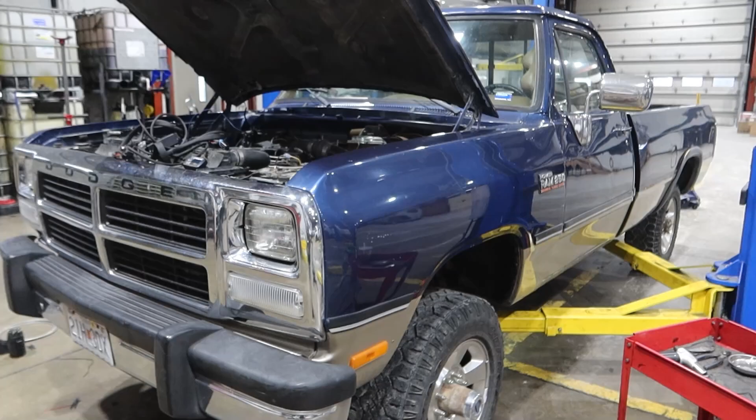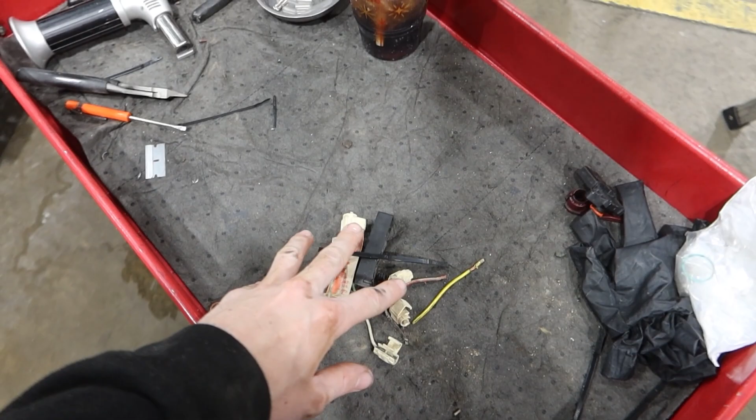Alright guys, we are back with the blue truck here on another portion of the 47RE swap. Today we're going to be doing some of what people question about how to control the 47 and make it shift. I've already cleaned up some wiring down there, got rid of a bunch of the Jesus clips that were in for a trailer brake, and just cleaned up the wiring on the side of the frame.

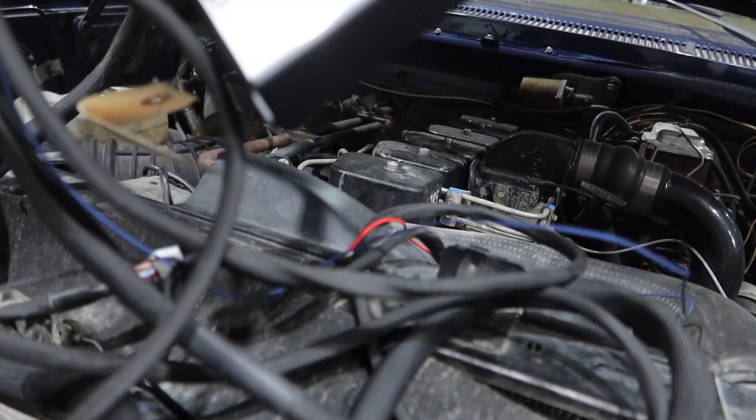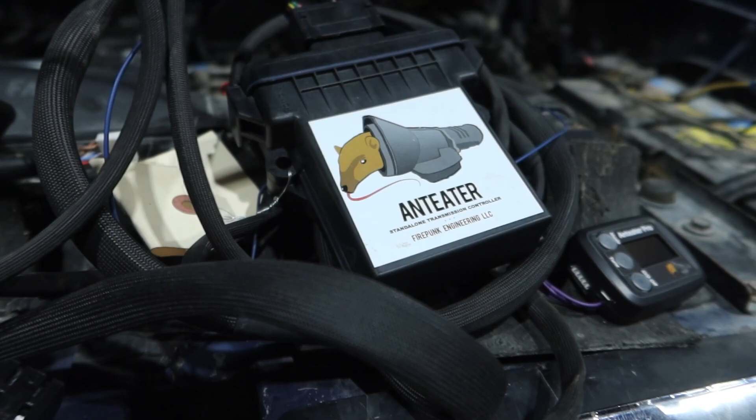So now we're going to roll into the transmission harness and putting in our Firepunk Anteater. This is kind of what makes the world go around with this swap, because you have to have this in order to run a 47RE in a first gen, because a first gen cannot control a 47RE on its own. It's electrically controlled, so most are worried about adding more electronics to a first gen, which I'm going to be doing a fusible link delete.

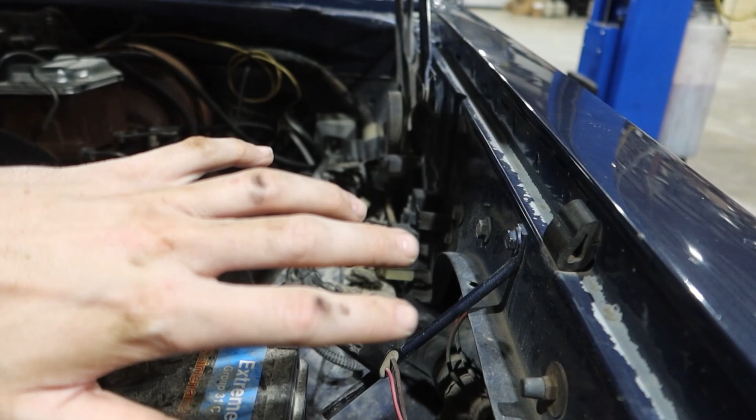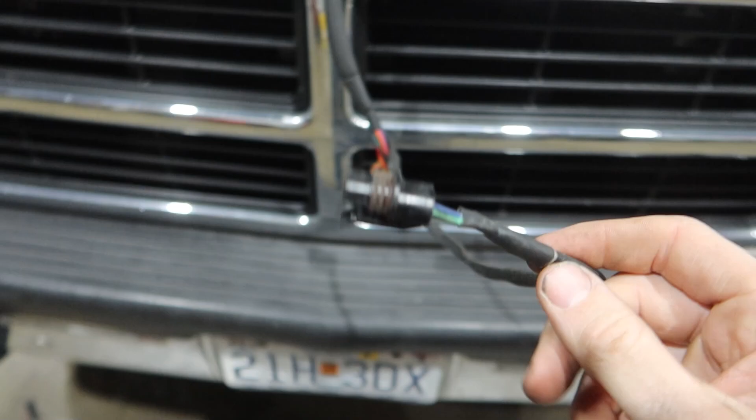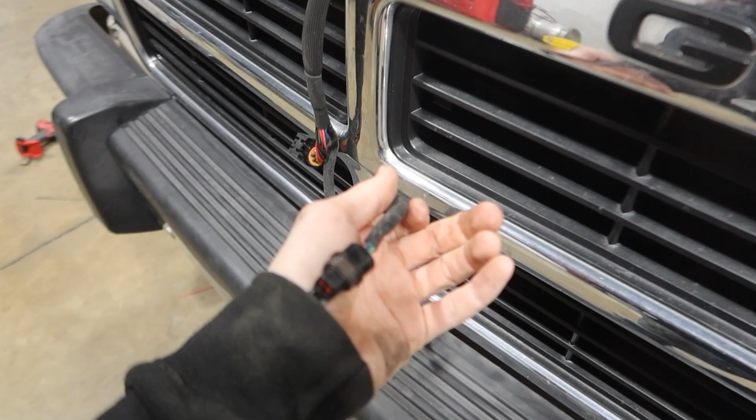So all this will be cleaned up, and you just have to have good sources of power, and there's really not much to this. So here's your control box, and then here is what goes down to the transmission. You literally just have your 8-pin that plugs into the top of the transmission at the valve body, and then you have your speed sensor that plugs into the transmission itself. So you are not sacrificing anything with the factory speedometer by unplugging it, because the factory speedometer is in the transfer case. So you'll be able to maintain your speedometer on your dash, and then the anteater will be able to read the speedometer it needs to see for shifting and whatnot.

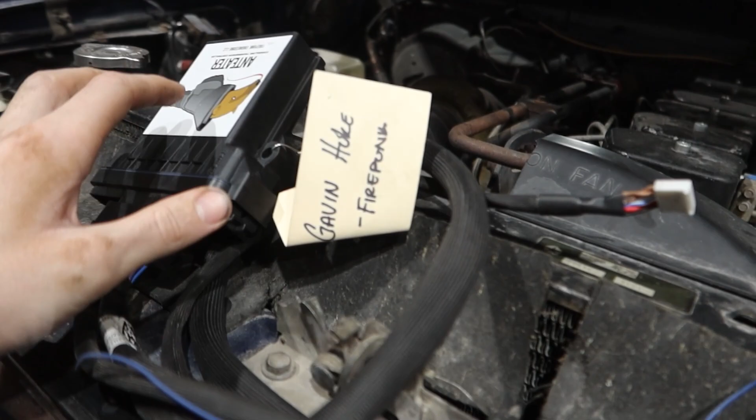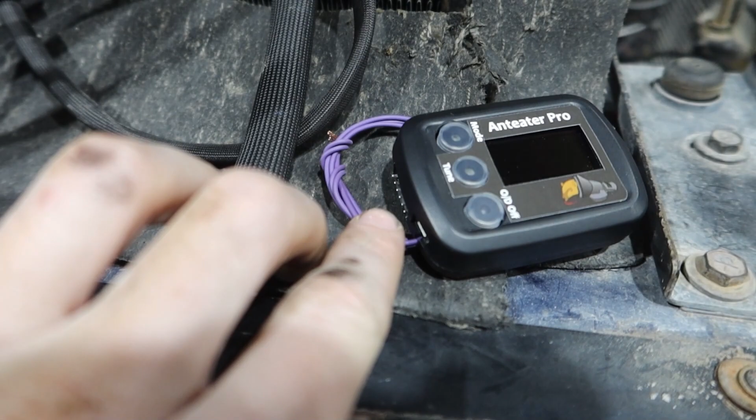This connection right here plugs into your anteater. The purple wires coming out the side are for the tap shift. I will show you guys how I'm going to do the tap shift whenever we get around to that. That'll probably be a separate video.

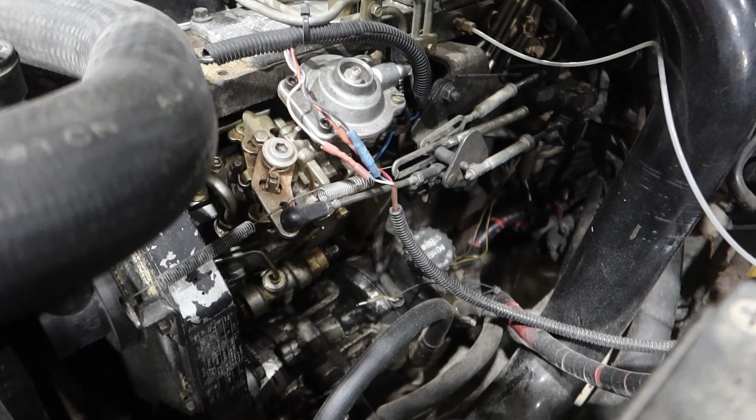And then you've also obviously got your wires. There's going to be a power and a ground, and then you're going to have a TPS wire. So that's another big question: first gen TPS sucks. So what are you going to do around to make that function as it should? Essentially, all I'm going to do is get a first gen TPS and just try and make it work. If it doesn't, I'm going to try a 98.5 to 04 TPS and see if that will work. I'm just going to see what works best, really. So you guys will have to stick along to see that part of the progress, but we're going to go ahead and wire this bad boy up, really just try and make our whole trans harness look clean.

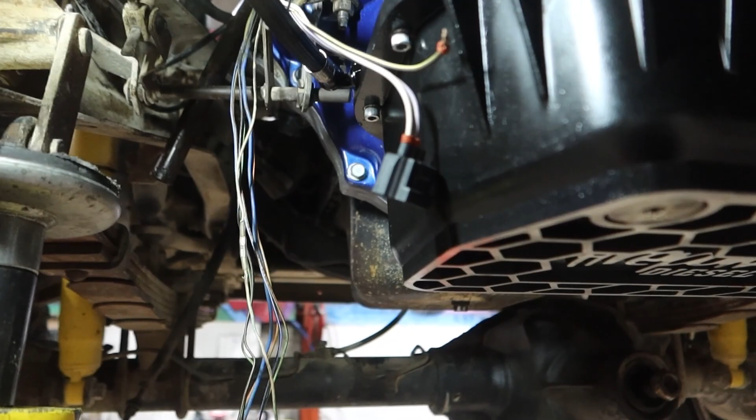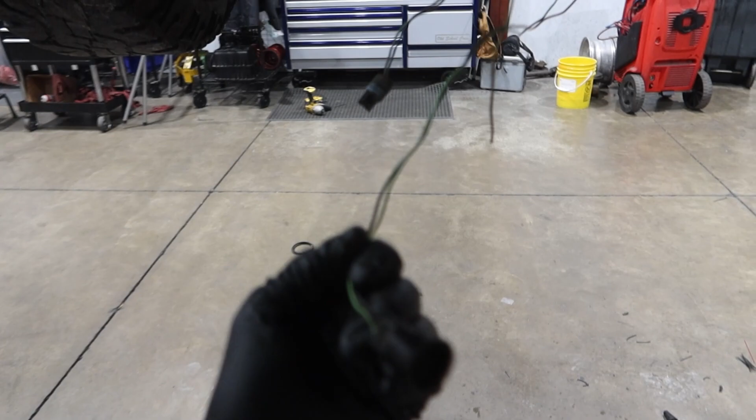Alright, I want to show you guys what I'm doing. So we've got our whole harness here for what the original transmission was. All of what I have in my hands right here, we don't need anymore. It was some old, like a transmission line temperature sensor, and then maybe something else, I'm not sure what it was, and then the T-case sensor, the four-wheel drive sensor. Don't need any of that. I pulled my neutral safety wires, if it'll focus, pulled those out of it.

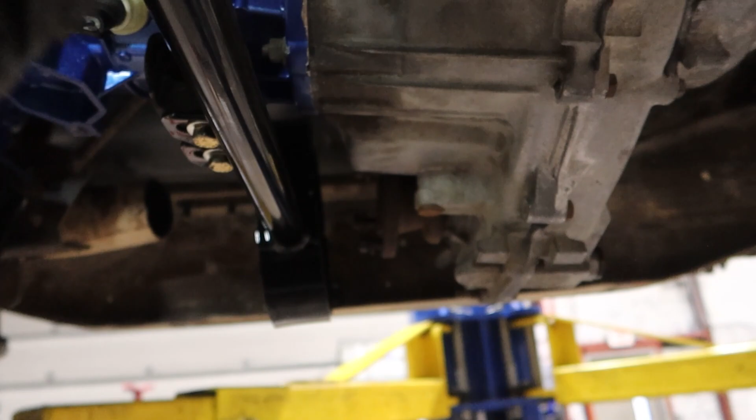And I pulled my factory speed sensor wires out of it, so got those both strung right here. I'll loom them up, and I had to repin this connector because my old connector had seen much better days. This thing isn't focusing very good today, but you get the idea. The connector was pretty well toast, as far as the clip on it, it was no good. So I went and got a connector.

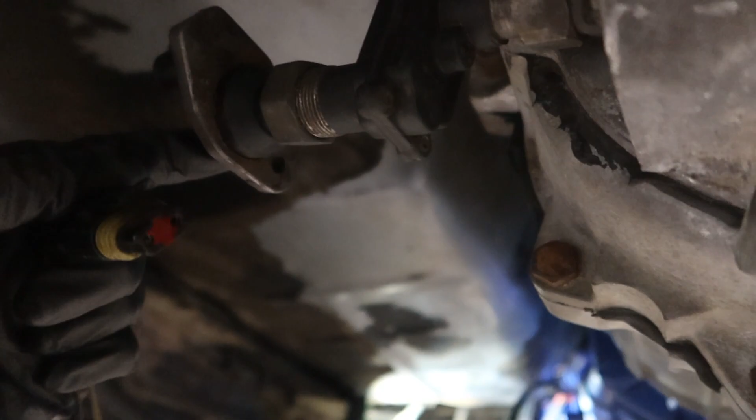The oil pressure sensor is the same connector. Okay, oil pressure sensor is the same connector. So all I did was go to the harness on the shorty, because none of that's being used, and I just cut the pigtail out of there, and it plugs right in. Works great, and the clip's good. So I want a good connection here on the speed sensor, because nothing drives me more crazy than a non-working speedometer. So we've got that.

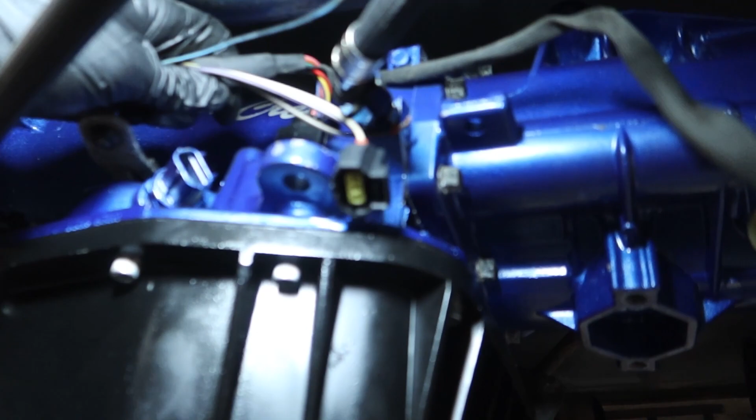We're going to splice that in, but before we do that, we got to put loom on everything. So a little bit here, which I don't think I'll use that, I'll use the actual loom that's not split loom. We're going to put the anteater stuff and everything in one harness, so you won't see the split up wires.

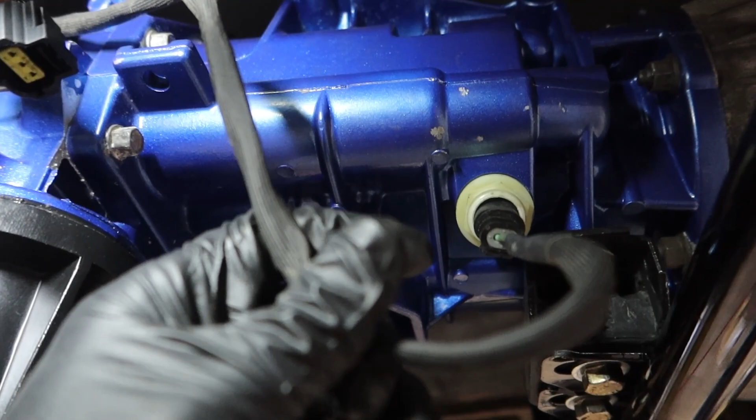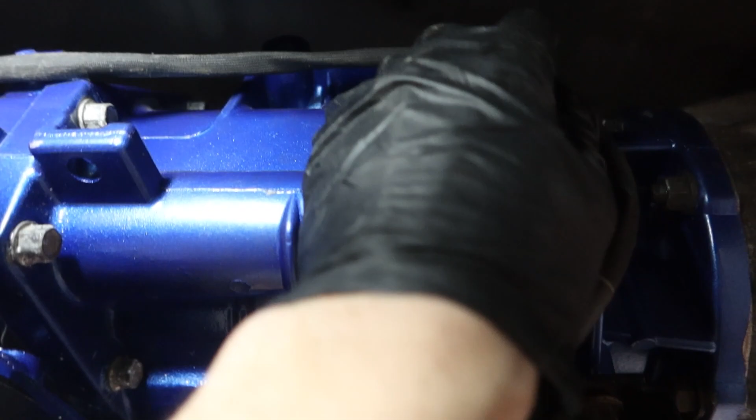It won't be two separate harnesses, it'll be one big one. I might shorten the speed sensor harness on the Anteater because it's way too long, and I want everything to be very clean and tidy. Or I might leave it alone and run the harness up around there with a zip tie, Christmas-tree style, around them into the mounts up here so that'll tuck it up. We'll see, but basically just tidying up wiring and making things look nice.

You guys can see from earlier that this already looks way better. There's not just clusters of stuff, it's pinned up to the frame. We got everything in the loom and all the Jesus clips out. We call them Jesus clips here at the shop because when you use them you're just saying, God, I hope this works, because they are worthless.

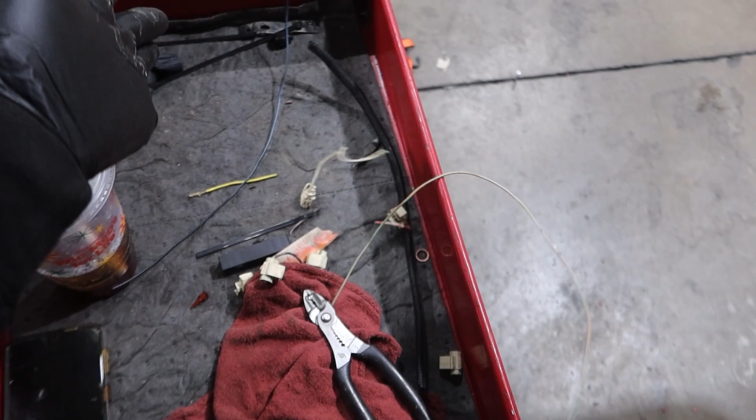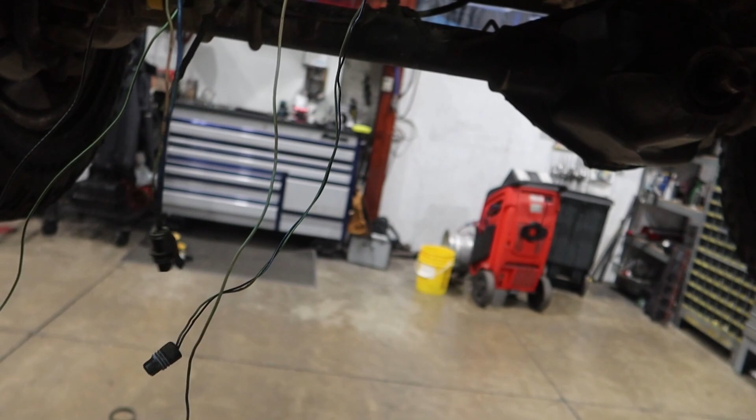I'm going to continue with the wiring portion. The wires we're not using, I'm going to cut down here, but when I get back on the top side of the truck I'll pull them out so they're not just a bunch of cut ends still receiving 5-volt or 12-volt power — just so nothing happens. I'm going to try to do it the proper way. But I'll keep some of these pigtails because they're very common on these trucks, I might need them on another broken clip or something. So that's what we're gonna move on to.

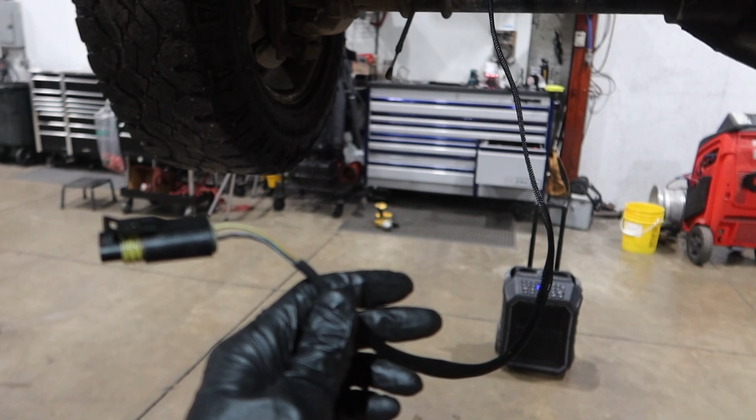A little bit later I want to show you guys my finished product for the most part, besides hooking up my neutral safety switch after I remember which pins go where. It's loomed all the way to the top, heat shrink everywhere down to the split, then there's the neutral safety, and here's my speed sensor wire that goes on the T-case right here. That's literally it — I wasn't able to consolidate them into one loom because I didn't want to de-pin the 8-pin connector, it's more time than I want to spend. But they'll run up next to each other, and I'll zip tie them together to make them look like one harness, then pin them right here.

It should look good. So in a couple minutes, after I get the neutral safety taken care of — I'm hoping I get it right on the first go, because I had it right before and messed it up — I'm gonna try that, then loom it all up nice and move up top to continue that part.

This really isn't that lengthy of an install by any means. I'm just trying to clean up Chrysler's terrible wiring — it's messy and crusty, so I had to repair some wires while I was at it. But it's turning out a lot better. Once I get these lines pinned up it'll look even better, and once we get rid of our factory fuel stuff and put an AirDog on it, our fuel lines will be gone, so I'm pretty excited for that.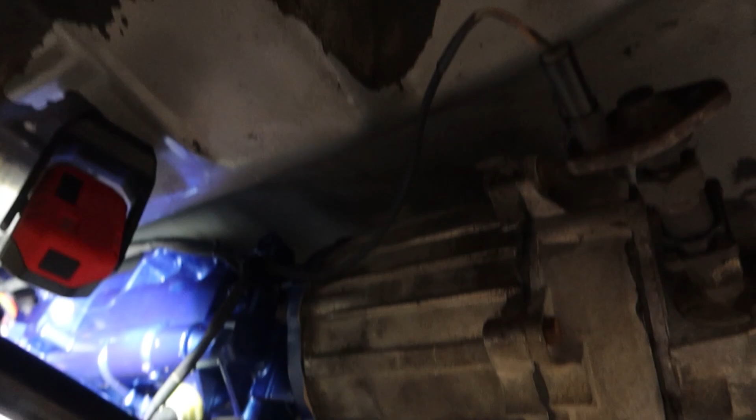Alright guys, so I'm finally all tidied up down here. I got everything pretty loomed up. This is where the split is for the neutral safety and whatnot, and the Anteater harness is up there. Looks pretty clean. Here is the neutral safety pins.

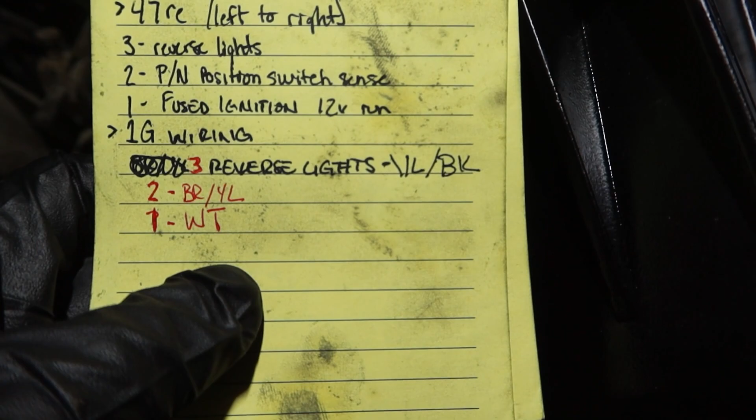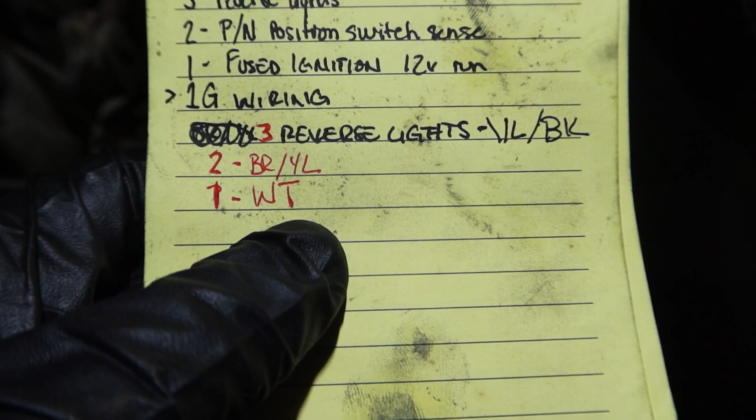Here's the after of the video I took earlier where it was very messy with all the different wires down here, but we're going to lower the truck and go up top and start working up there. Here's the finished product for that.

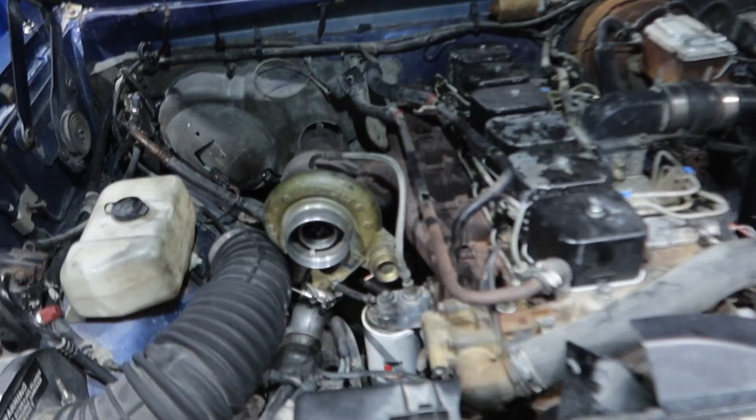Okay guys, I want to show you some notable things to keep an eye on if you are getting rid of your heat exchanger. As you know, I did delete my heat exchanger when I put the new trans in, because I got rid of the factory lines and all that stuff. The factory trans cooler was literally about the size of this, a little bit taller, that's it. But my new CNR cooler will do everything that stuff did and more.

But the top heat exchanger piece - let me get the light in here. You can see where that was right there, where I've got that fitting in the block. I'm gonna guess that's like 1/2 inch pipe thread, maybe 5/8 pipe thread, not 100% sure. I just had one of the plugs, luckily. And the next one is on the lower water neck down there, because that's where it goes into, and it originally would have had this style fitting.

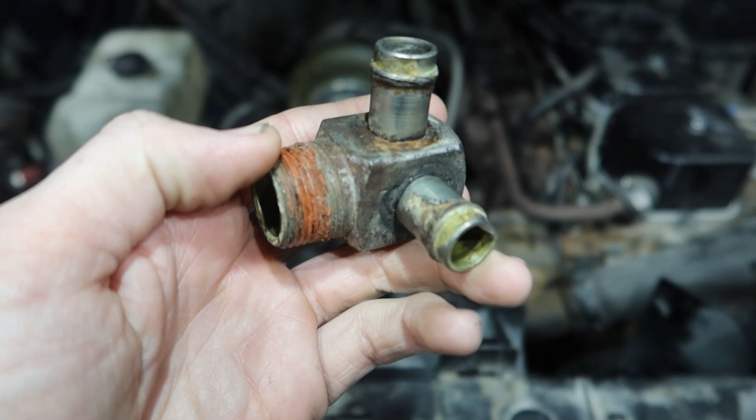So one side goes to the heat exchanger, the other side goes to the heater core line, which is right there. So essentially, if you were to know this ahead of time, all you'd have to do is order one of these for a manual truck, because the manual trucks obviously do not have the heat exchanger.

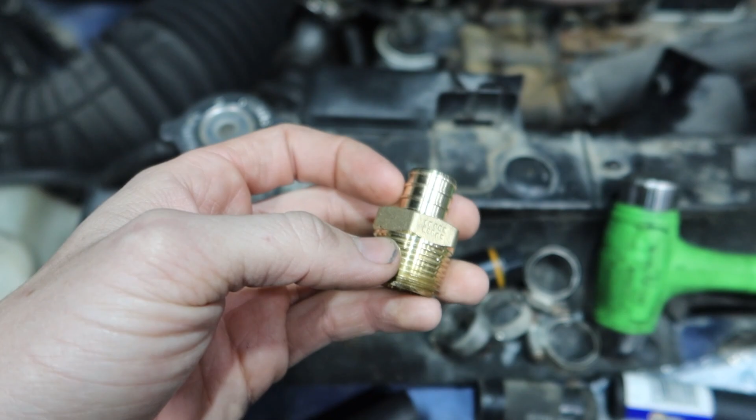Now, with that being said, I didn't want to wait. So if you're caught in the same predicament I am, I went down to my local parts store and found a 3/4 inch MPT barb. And this is, technically it's 5/8 - this paper says it's 3/4, but it fits in the 5/8 side, so I don't know if something was mislabeled. Not really sure on that, but it is 3/4 inch MPT. That you do need to know.

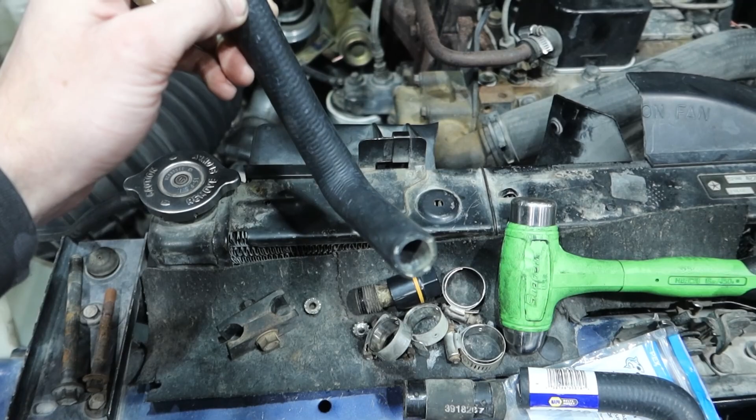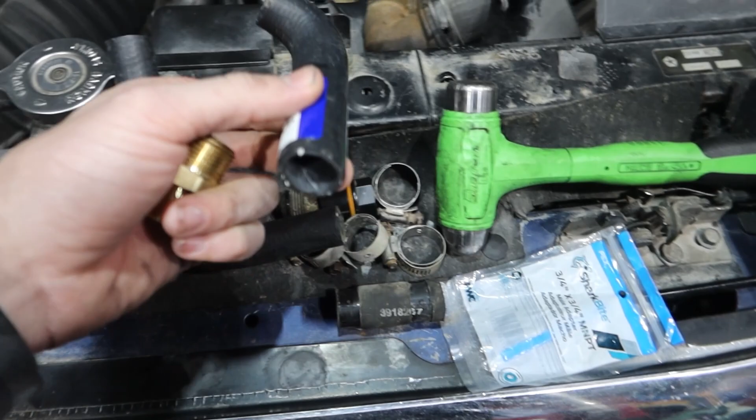But you just need a 5/8 barb, really, and I got a 90-degree hose from them, and I'm gonna cut it down to make it work, essentially, and obviously got to use hose clamps on each end no matter what. But this hose actually adapts to 3/4 on one end - it was a big hose like that, and this end's 3/4, which is too big, but it doesn't adapt up until you get up to here. So I just cut it off early, because this is more than enough than what I need. I only need like this much of it, because here's the piece that came off of it before. So we need about that much going up, and then about right there.

So here's the part number for it, got from Napa. No, I'm not saying this is the route you want to go. Obviously, if you think ahead of time, you go ahead and just order the factory piece.

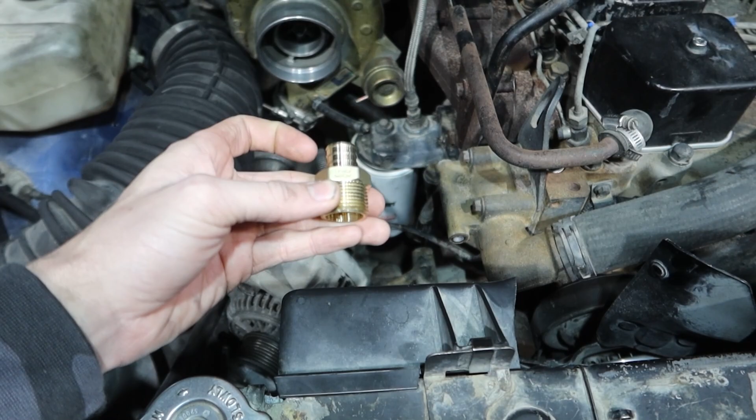But what I'm going to do is get this in there and then kind of mock it up to see where the heater core lines need to set once I put the supports back on them to make them set right. And then cut the hose to length, and then put hose clamps back on it, and we should be good to go. As long as it doesn't leak, I'm going to vac the system down, make sure I've got no leaks, and then fill it with coolant.

Obviously, I really would like to get rid of these lines and put braided AN lines there, but it's not worth me messing with at this point. It's not really a concern, because everything's still good, everything works, so there's not really any point until this finally gives out, like most of them do. Which I'm sure this one doesn't have a whole lot longer, because it doesn't look like it's that great. We might go ahead and just put all AN lines on it, but I need to order stuff before that. I'm not going to let this fitting keep me from driving the truck.

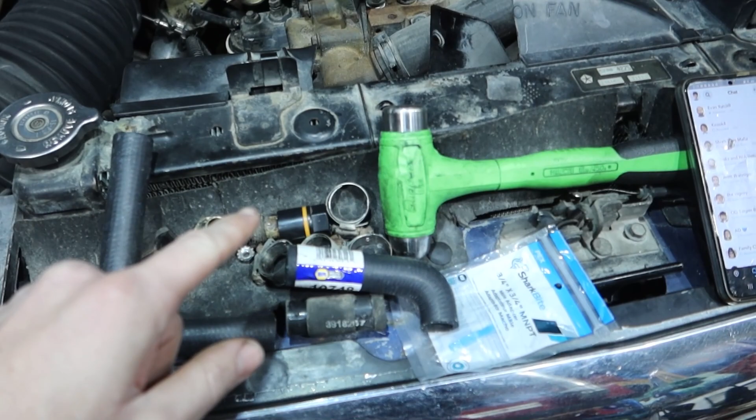Now, the truck won't be done today, but it will be done very soon. I think maybe next week. Once my drive shaft's here, we should be in business. But there's that, so that's what I'm doing right now. Hopefully we'll have this all back fixed up. We'll mount our alternator back up, get the belt back on, and we should be in business.

Oh, and I found one of my oil leaks. The oil cooler housing, there was 2 or 3 bolts that were literally hand tight. There was about 1/8 of an inch between the head of the bolt and the housing, so somehow those loosened up. So I got my torque wrench and torqued those all back down to 18 foot-pounds. They all look good to go now. I cleaned it off with brake clean, and so far nothing's leaking yet. That'd be great if that leak got fixed. It wasn't very noticeable, but it did drive me crazy whenever that portion looked kind of damp. But that's what I'm going to work on today and try to finish this up and pull it out of the shop.

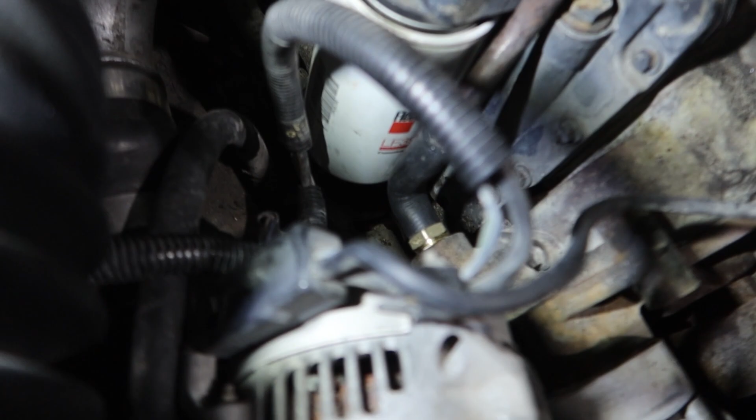Okay, I'm going to give you guys a quick look. We got it trimmed down a good bit. It's not kinking or anything like that. You can kind of see the 90 and how it's doing. There is clearance about a little bit more than 1/4 inch on the back side. I could maybe trim a little bit off the bottom 90 if I wanted to, but I think that's going to work and give me enough room to bolt my supports up over here. So I think I'm pretty happy with it. I'm going to tighten down the hose clamps. I've already tightened down the brass fitting into the lower water neck, so I think I'm going to roll with it and hopefully it works. I don't see why it wouldn't, but let's see.

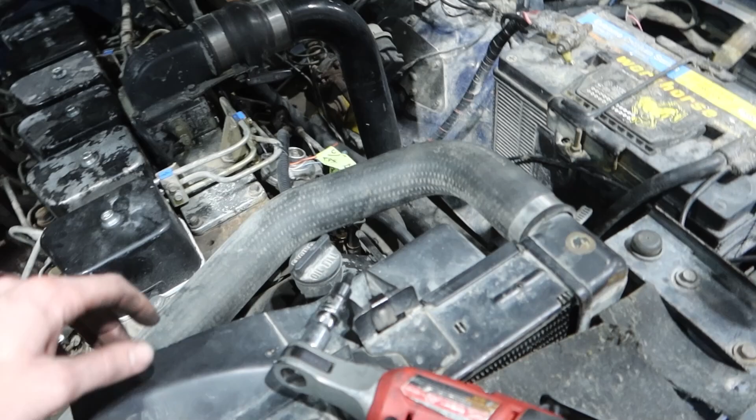Okay, so we got the alternator put back on, coolant back down and filled, and took the valve covers off and cleaned those out because they needed cleaned. They really hadn't run the truck with them, and yeah, there was a bunch of stuff inside of them essentially. But got those cleaned, put back on, got our TPS labeled, what wire does what. Obviously you got a 5-volt supply, a sensor return, and then an actual TPS wire. Our anteater is mounted over there on the fender for now. It's mounted, it's bolted up, but that's it. I'm probably going to end up moving it once we get our panel for our fusible link delete.

Now I need to get the TPS or the TV lever, whatever bolts up here to the pump and goes to the transmission. I need to take that off because with the anteater I'll be running a static TV lever. So that's our next thing to tackle, and then I think I should be pretty well ready. Got to put the static TV lever on, and then we'll be good.

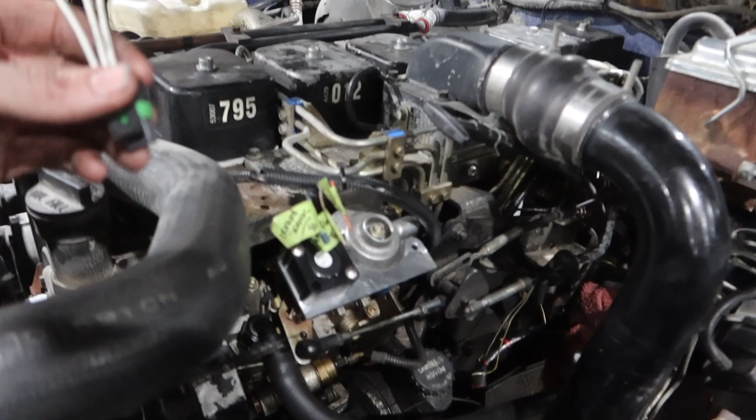All right, so this is still part 4 of the 47 swap series. Obviously all my wiring up here looks probably subpar. Everything is just hooked up. We already did the dyno stuff, so I just hooked everything up to make it work. Although the TPS is not hooked up, which we just put a flat line to in the anteater to make it work. But now I have my TPS bracket and new TPS that I'm going to try, and a pigtail in order to do so. So I looked up the wiring schematic, labeled my wires already, and we're gonna hook them up and see if this can work. I think it will, but we'll have to play it out.

One thing to watch for if you set one of these things on is check your throttle travel, because the TPS was stopping it and I had to readjust the bolt head or the Allen head that the TPS sets in. I had to tighten it down a little bit more, and now I have full throttle travel. I wouldn't have really looked for that if it wasn't for Mr. Evan Ratcliffe. He warned me about that, and that's the first thing I looked at, and sure enough he was right. So I'm gonna go ahead and wire this stuff up, and I want to show you guys our anteater mount. I think it looks pretty good.

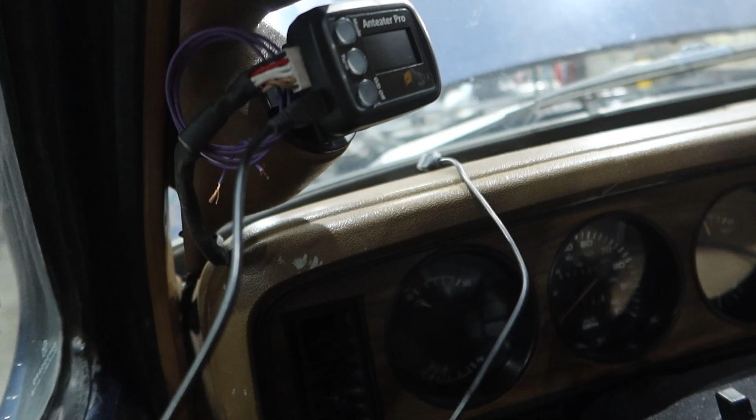This is obviously just our cable to plug into the laptop to tune the Anteater, but it mounts up to the gauge pod. Really happy with it. I'll end up putting links in the description, and then these purple wires are for my tap shifter, so we'll also be getting that wired up.

All right guys, so I got it wired up and the TPS put on. This is actually like 90 degrees off of where it usually sits, I feel like, from what I remember, but this is how it had to be set up for what I'm doing.

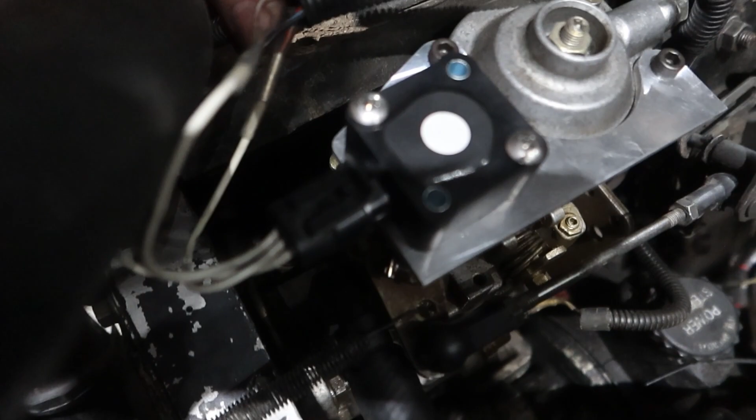The one you tap into with your Anteater wire is the orange and blue wire. It's going to be the middle wire on the plug. Right now, how it's set, it reads 0.3 volts, and then at wide open throttle it is at 3.1 volts. So that's how it sweeps.

It's not restricting my throttle travel at all. Whenever you get in here, your Anteater will turn on, and if it focuses, it shows TPS percent right there. There's 101, 102, and then all the way off it's 0.

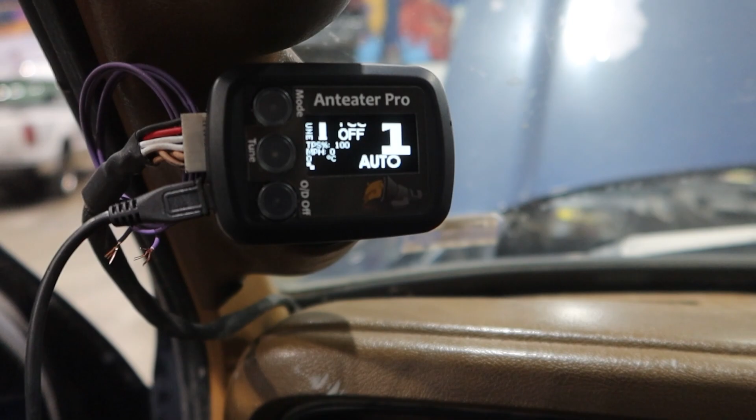So got a base file loaded in it. It should be good enough to just start off with, and basically you've just got to drive it and make adjustments all the time. Once you get it where you want it, you're good to go, but it's going to take some driving and learning.

Alright guys, I am on my first drive home. Obviously the lighting is going to be very poor, but I wanted to bring you guys along for it and just kind of see how the truck drives. So I'm coming to a stop and leaving my stop here. It is in first gear, so the Anteater's working.

So there's definitely a hang up there. I've got a lot of work to do on my Anteater tune, but I have the base file set up for the most part, which will get me home and shift fine. I have lockup not coming in till after it shifts into overdrive, just so it's not as violent.

With having lockup and no traction bars, it is extremely violent. If you're gonna be doing this swap, you need to have traction bars, and there is no argument there. If you know what traction bars do and what purpose they serve, and the fact that they're not just for looks, that's why you need traction bars.

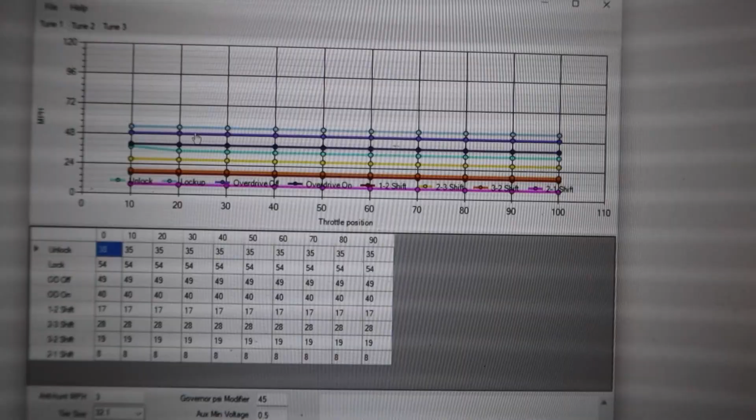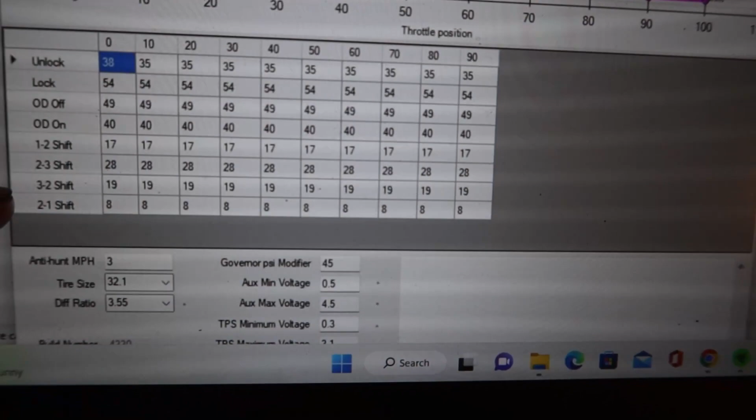Tune 2 would be a fine flatline tune file for you to go test drive the truck on. It'll do fine. The downshifts are rather aggressive for a mechanical truck. So if your truck's throttle likes to hang and you just have it on the verge of runaway, definitely be cautious, and I would probably go in on the tune file and move your 3-2 and your 2-1 downshift lower than what it's set at to start with, because it might hang and give you a little scare. But let's go ahead and look at mine.

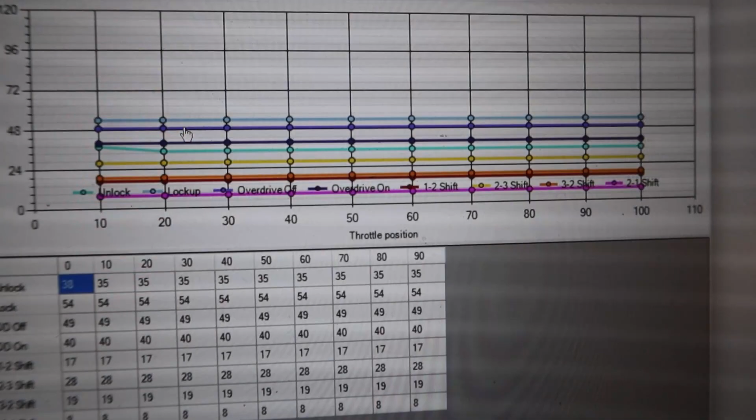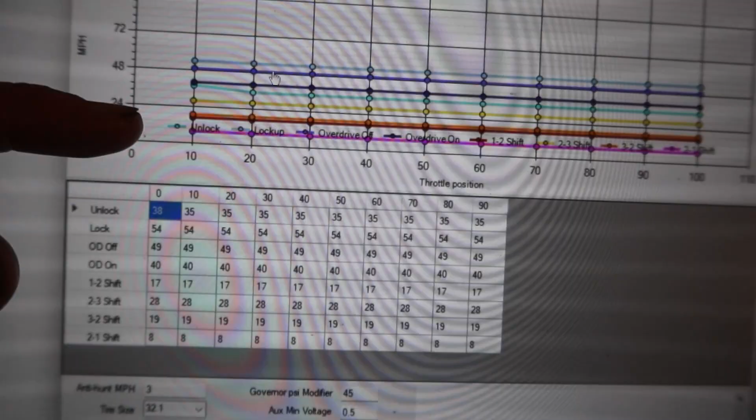The biggest tip that I was given by Landon was the way that all of these colors are in order right now. Go ahead and write them down, or if you have something to reference, keep that, because you have to keep them in this order.

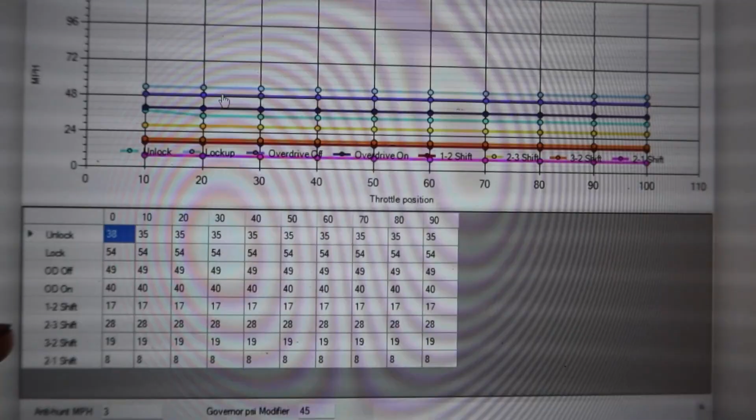For example, my first test drive, I had an issue with it not making the 1-2 shift, and it turned out the 3-2 downshift was causing an issue with it. So my 3-2 downshift was a higher mile an hour than what my 1-2 upshift was, and it does not like that.

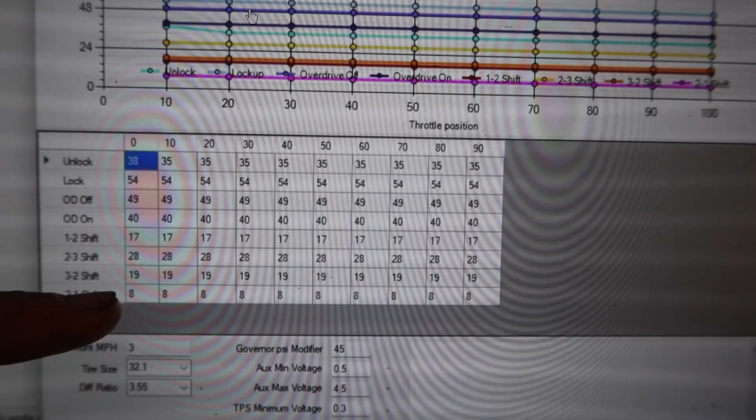So it would not make the 1-2 shift. Essentially, the only reason I moved my downshift so low was because I didn't want the throttle to hang, or I don't like the really harsh downshifts with a mechanical truck just because of the RPM hanging up there.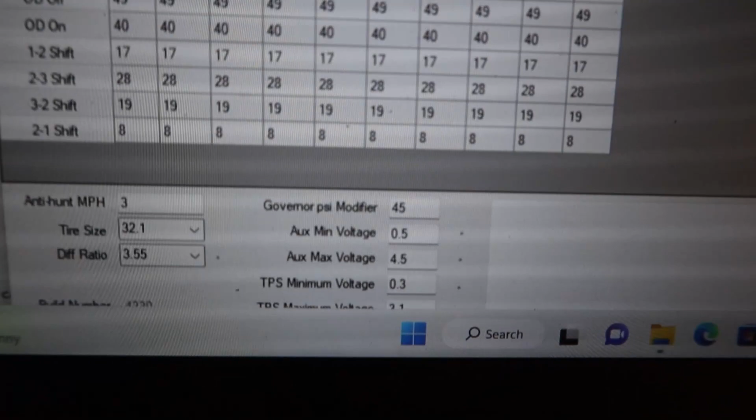Now, you can go ahead and just take a picture of this table if you want to start out with this. I have my TPS minimum voltage and maximum voltage set in there. Landon said not to set any lower than 0.3, that's really the lowest he goes with these. And then my maximum voltage, which you can't really see - let me make this full screen. There we go, my maximum is 3.1.

Obviously we got 3.55s, it gives you a bunch of options to click on. We got our tire size in there, make sure that's all accurate. The rest of it, I'm not sure. You could change your governor pressure modifier and your voltages there if you wanted, or if you're instructed to. I'm not messing with mine yet.

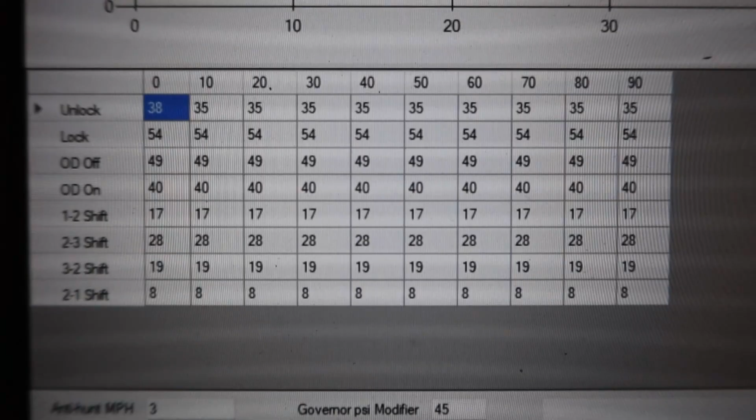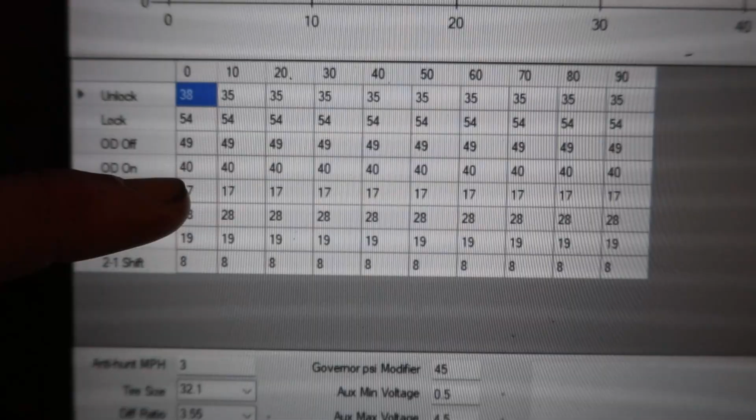But here is just kind of the daily driver tune, I like to call it. You'll see that I've got overdrive on before lockup, so overdrive is going to come on before lockup comes in. And that's just so I can have smooth shifts without really being aggressive with it, without traction bars. I will have traction bars. This is the way I'm setting it up for now.

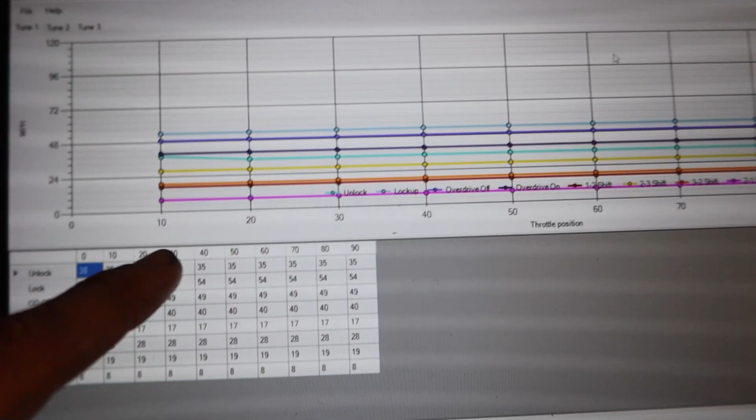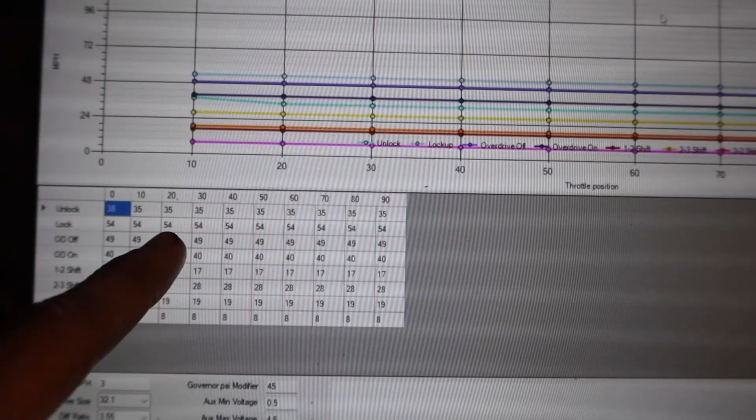And it's just really easy shifting and just a nice little daily driver tune. So now what I'm going to do is try and make a curve here. So whenever you're third gear, or for example, if you're third gear locked up and you start rolling into it, or say you're fourth gear locked up and you want it to downshift to make it third gear locked up and roll into it and just get after it, you can do that with the TPS hooked up.

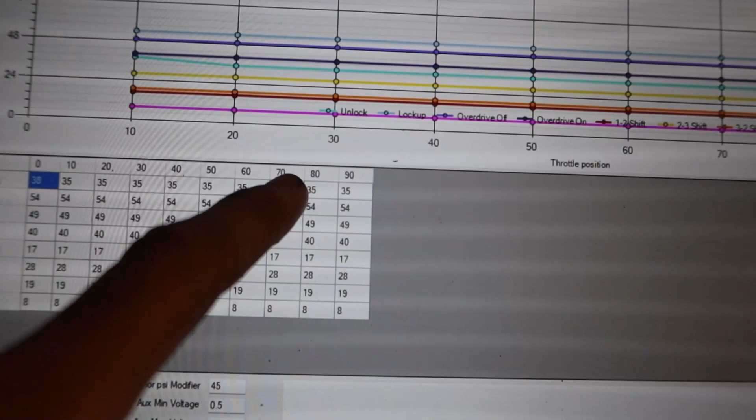Depending on your throttle percentage, which is across the top, you can change what mile an hour you want it to do what at. It's a very simple, self-explanatory system. It works great. So far my test drives have gone well, as long as I understand this and understand what's going on. And obviously, if you do this exact stuff and you have a first gen, we got pretty good tech support whenever it comes to this stuff.

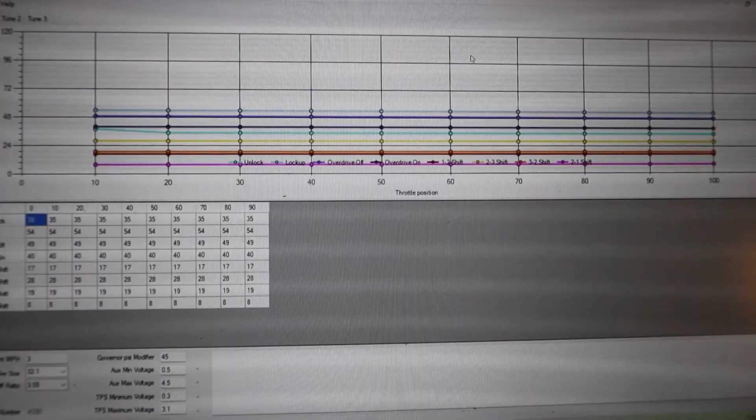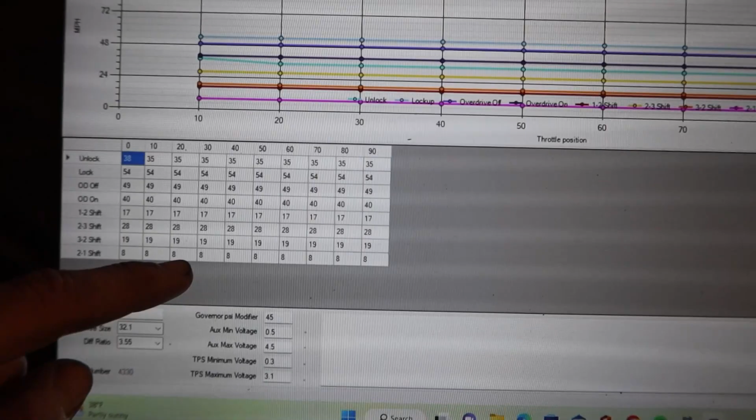Because with this, you just tap a couple things on the keyboard and you're done. Versus with an RH, you have to go in and change things in the valve body. Yeah, screw that. I know people that have run into that. I would rather do this.